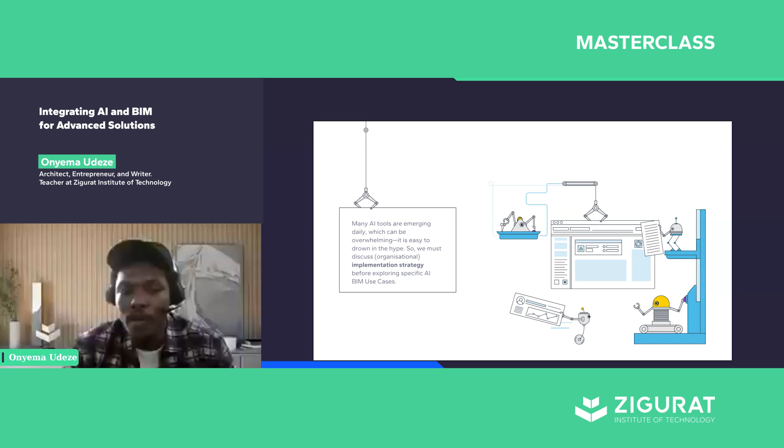Which is why it's important to also have what you call an organizational implementation strategy before we begin to explore exactly what the BIM use cases are, how we can merge AI and BIM. So before I talk about integrating AI and BIM, which is the focus of this class, it's also important to have a brief overview of the importance of an organizational implementation plan or strategy for every AEC firm.

So just like BIM, AI is also a change management process. It's technology backed, and just like every change management process, you always have three pillars: the people that are involved, the process itself, which is your business changes and all that are involved, and also the technology itself. Today we have a lot of AI tools emerging in the market, so these three pillars are very important.

So if I'm to put it in context, it's always important that a firm, instead of just jumping into the AI hype - for example, today you hear there's a tool called Veras from Evolve Lab that can help you automate your documentation in Revit, and you just jump in and purchase the tool. Tomorrow you hear about using ChatGPT to create custom GPTs, train it with your own data, and you launch and purchase that. Next tomorrow you hear about Lucid AI. So you just jump all over the place. If you don't have any cohesive implementation strategy behind all this, it can become expensive over time.

And as you can see, there are a lot of costs that can also come with AI implementation. So, summarizing, it's very important that you have a business analysis as a firm and decide exactly where you need to focus for your implementation. This might require some organizational restructuring in terms of your talent, so you need to review the talent you have in place - what are their strengths, what are their weaknesses.

So it might also require you to employ some new people. This can be full-time, it can be contract, it can be outsourced, and it might also require you to carry out what you call taking, shaping, or making new solutions. So I will explain these three terms - there are three scenarios.

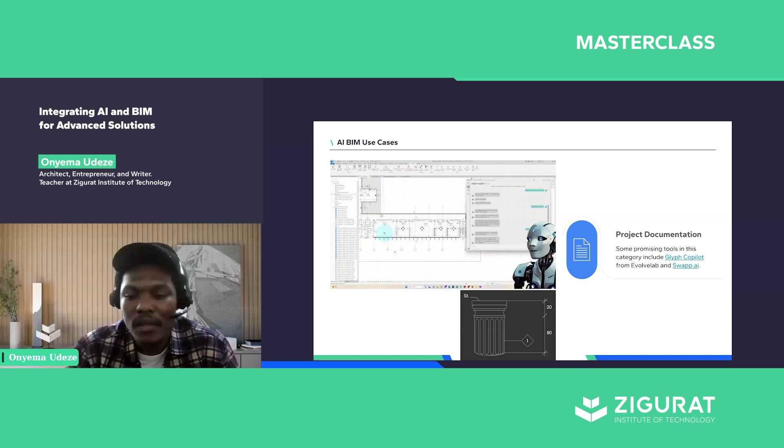The second use case I have here is generative design. As an industry, we've moved from CAD to BIM, and generative design is a design workflow that is looking promising, looking like the way of the future, where instead of modeling based on our skill sets, we are basically giving these tools some guides, more or less, and they will give us samples and help us do a lot of conceptual design analysis.

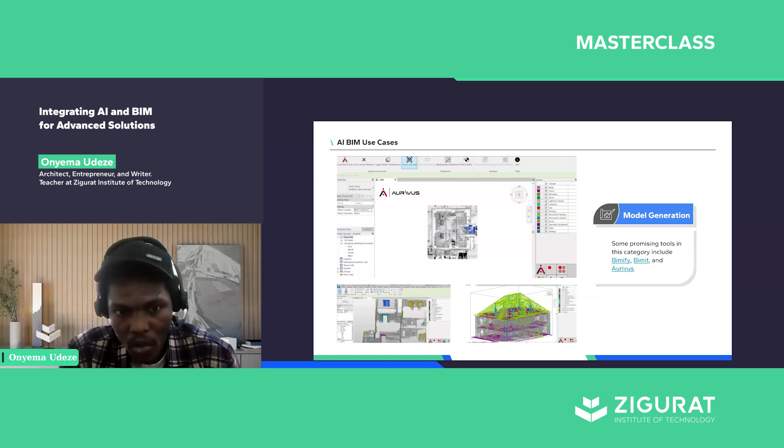The fourth use case I have here is model generation. We can use AI in the future to automatically generate BIM models from PDF files, images, CAD models, and whatnot. Instead of spending so much time creating the BIM model, you can feed these tools with a PDF file, for example, and it will give you a good starting point. Of course, that might not be the final solution, but it will save a lot of time. AI in the future can help us imagine just getting the PDF file done.

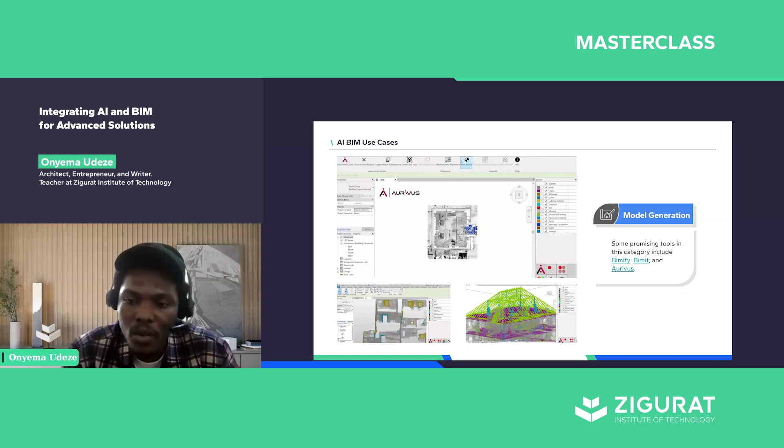Most of the existing projects today, you might not have any other information other than the PDF. Some of them you might even have just images, and you can feed this to an AI tool and it will help you to generate a BIM model. Some tools in this category today are BIMify, BIMit, or Aurivus. What you see here on the left is extracted from the Aurivus website. These are solutions that can help us generate 3D models very quickly. So that's another BIM use case for AI.

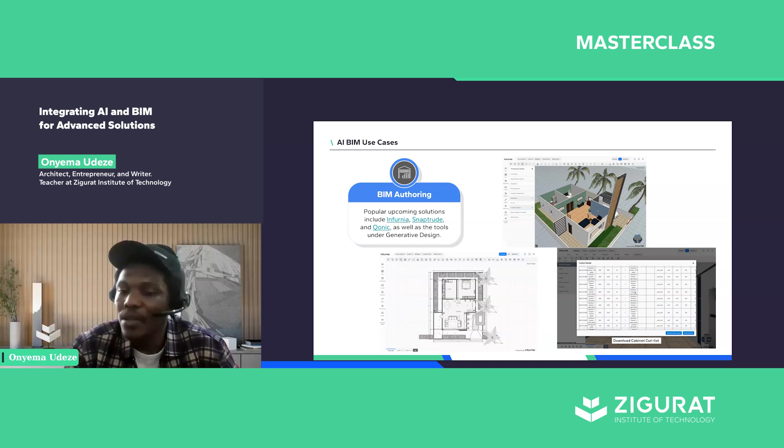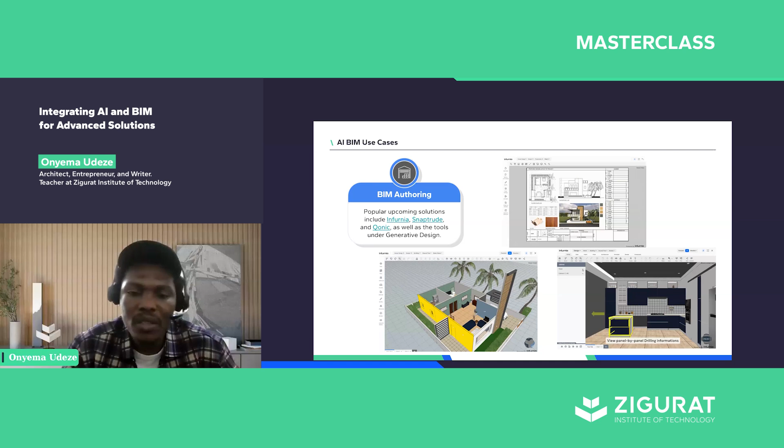Another BIM use case is BIM authoring. Like I mentioned earlier, a lot of the emerging 3D tools today are completely cloud-based solutions. A solution like Autodesk Forma, for example, is completely cloud-based, it's fileless. You don't need to worry about file formats like .rvt, .dwg, and whatnot. These are completely fileless, cloud-based solutions. And because they can generate a lot of granular data, it's easier for us to further train these solutions and make them even more intelligent.

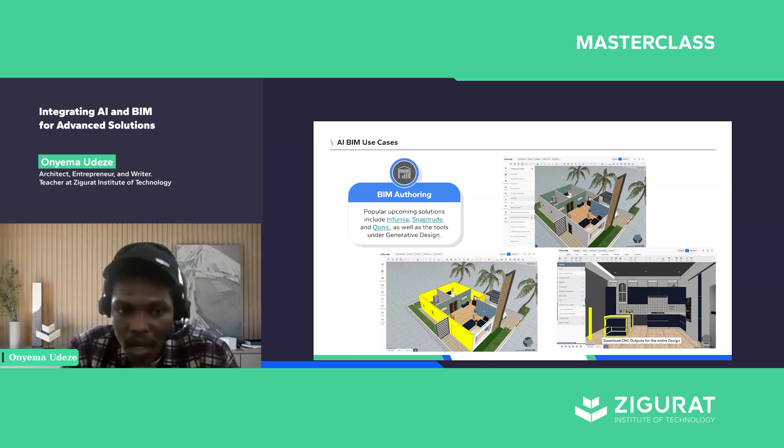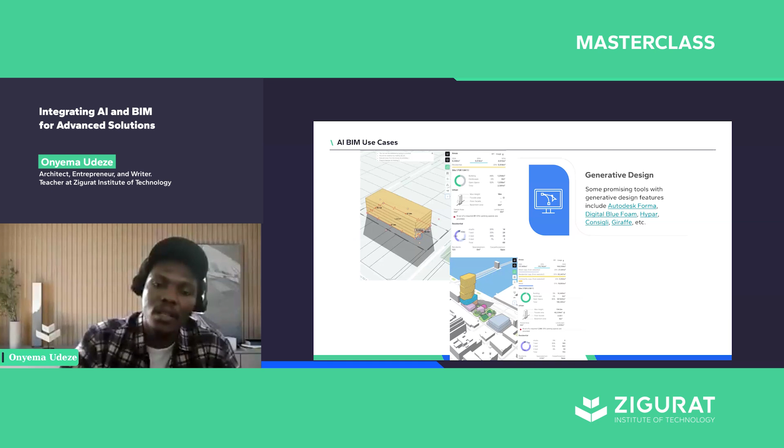In addition to the solutions I mentioned under generative design, these are also some popular solutions where AI can begin to help us with BIM authoring. We have solutions like Infurnia, Snaptrude, Qonic, as well as all the tools under generative design. Just to go back to the slide, these are the tools I have here: Autodesk Forma, Digital Blue Foam, Hypar, Consigli, Giraffe, in addition to the ones I have here. These are all tools that can help us to author.

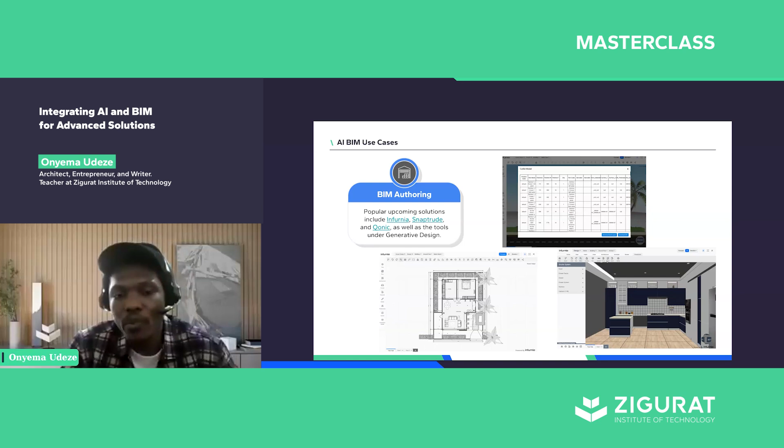So instead of using, maybe in the next 10 years or thereabouts, you might not actually be using Revit. I'm sure even Autodesk themselves are beginning to pour a lot of energy into Forma because they are seeing the scenario, or what is coming in the future, where we are going to be working less on desktop tools and more on cloud-based tools, because they are much easier to infuse with all these AI integrations.

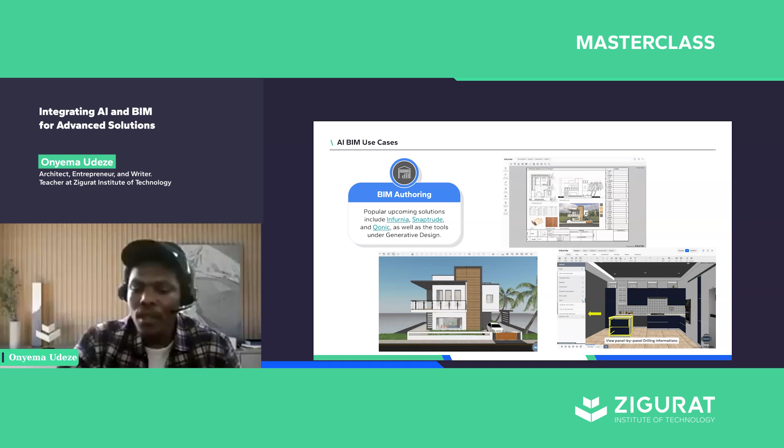Augmenta is basically for electrical design today, but they are even working on other engineering aspects like mechanical, structural, and whatnot. I also have Structure Plus. So there are a lot of areas where AI can also help engineers, even though they might not be as many as that of architectural and all that. But engineering is also another low-hanging fruit where AI can be integrated with BIM to give us much more advanced solutions.

The seventh, or the sixth that I have here, is construction analytics. So these are two things. AI can be leveraged for construction sites where you are using it to monitor. A very important aspect of AI that is useful for site is computer vision. Today you can infuse that with drones and whatnot to detect safety issues on sites. So there's a lot of solutions there.

You can also use AI to analyze the data coming from sites to give you much more insights that you might not be able to detect by just human intelligence. So there are a lot of tools here, and there are two things here. Like I said, you have construction on one side and data analytics on the other side. Some of the tools I have here are Sparkle.ai.

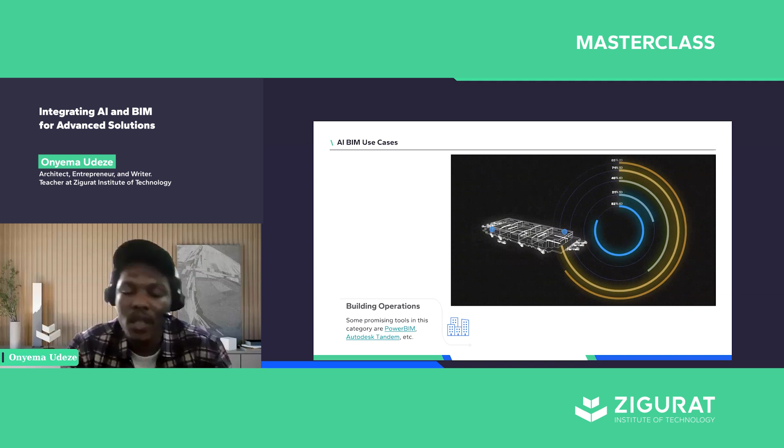For example, you have tools like PowerBIM and Autodesk Tandem today that can be used during the operation stage. Solutions like digital twin, where the digital version of that facility is communicating in real time with the physical building. These are areas where you can begin to analyze that data, and even use it for things like predictive maintenance and a lot of other use cases. So as you can see, AI spans across almost all the entire phases of every built asset's lifecycle.

And then we also have business operations. Day-to-day run of business is also something that is very key. This is an area where you can begin to use some of these large language models, LLMs, and assistants to augment your day-to-day businesses. You can use things like Microsoft Copilot, Microsoft 365 Copilot, ChatGPT, Claude, Perplexity, Fireflies.

Fireflies, for example, is a solution that you can integrate with your meetings. It just follows you to your meeting, and at the end of the meeting, it will basically record the entire meeting, and it can help you summarize that meeting, and you can even query it, ask it a lot of things. So these are areas where AI can actually begin to augment our day-to-day business operations. That's also another low-hanging fruit.

And I believe this is the last one, which is interoperability. Earlier I mentioned that one of the issues we faced with a lot of tools, solutions and software in the market, by the time we moved from CAD to BIM, we had a lot of vendors like Autodesk, Graphisoft, Bentley, Nemetschek, and all of them.

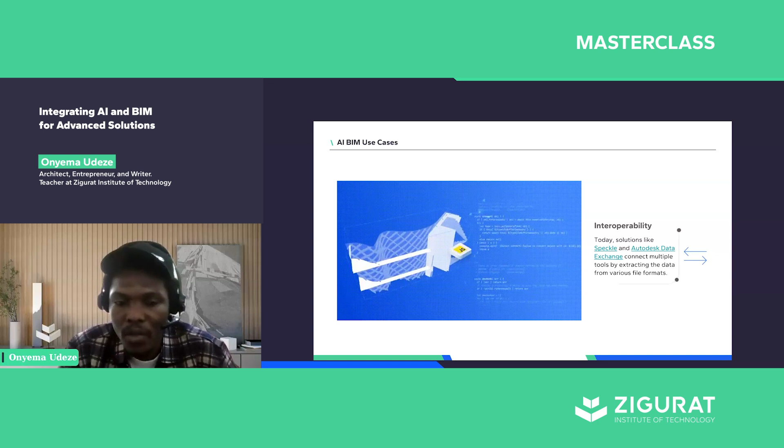So you have two interesting solutions. One is Speckle, which is what you're seeing here on the left. Basically what it does is that it can communicate in real time with a lot of different software, and it can extract the data from them. And then all that data, you can now use for your other designs. You can use it to carry out analysis and do a lot of things.

The same thing with Autodesk Data Exchange. And one good thing about all these tools, like I said earlier, is that they are all cloud-based solutions, which is why you see that where the industry is headed is basically cloud. Because most of these emerging tools are all cloud-based, it's easier to integrate and extract that data and use it for even more advanced analysis. So that is the 10th. I've basically illustrated 10 different use cases where AI can be integrated with BIM to deliver some advanced solutions.

I highly recommend that platform. You can go there and query it. It even has a custom GPT that is also trained on the website as well, so you can ask it a lot of things. There are a lot of use cases. And as I said earlier, AI is in its early phases and is rapidly changing every day, so some of these tools I mentioned might not eventually be the winner in their categories, but these are some promising tools and use cases that I have been able to identify myself.

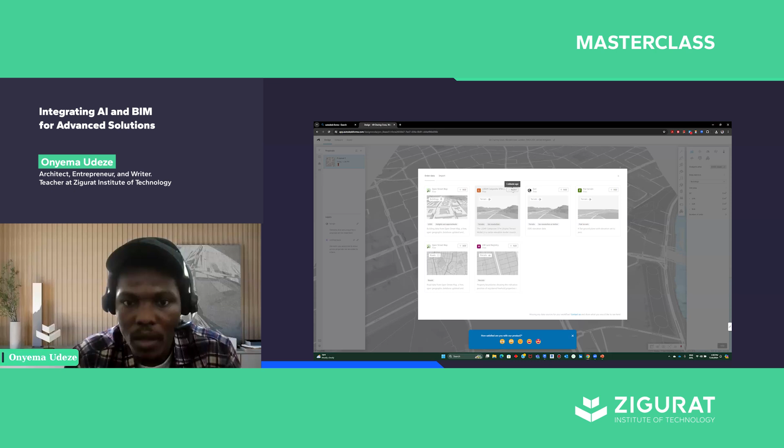Depending on what you need, you can see that this one has to do with topography—this is a 3D terrain model, it's already added. Some of them are geographical information, depending on what data you have available in that area—this is a terrain model and whatnot, and this is the road. I'll just add the terrain and road for now.

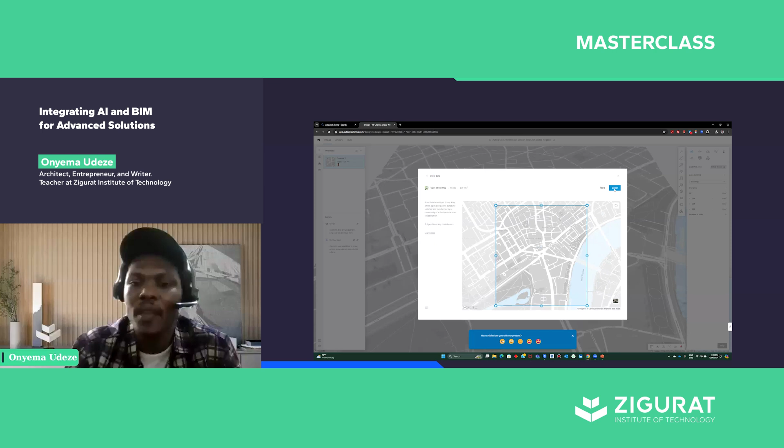And then you now need to define your area. So this is now what I have here. You can see, without doing much, it's already showing me what I have in that area. This is the point where, by the time you come here, you go to your library, you can begin to add some of these things that you've already brought in, and now add them to your project.

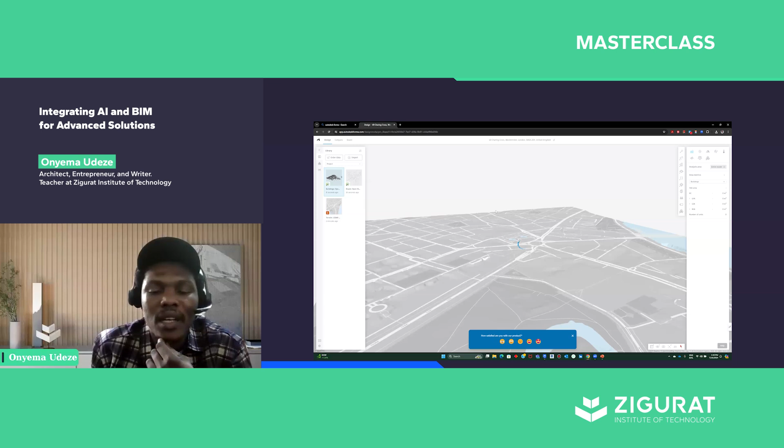As I double click on it now, you can see that it's trying to load it into my site. After that, you can quickly use the generative tools here on the right to come up with forms. Of course, because of time, I won't be able to go into details, so what I'm going to do is just use one of the demo projects—it's a very simple interface.

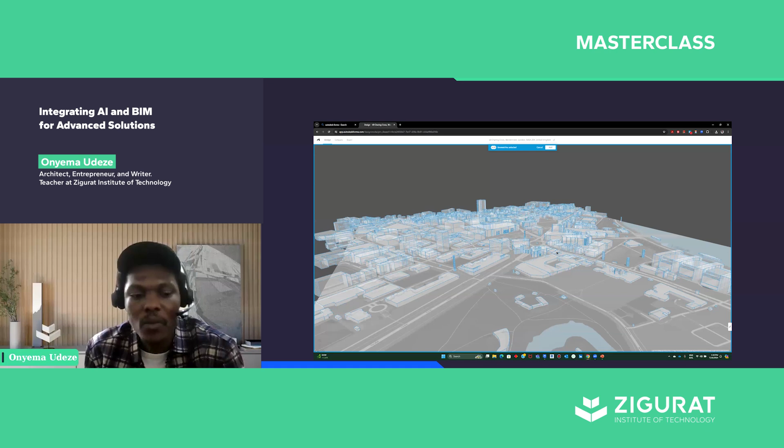What I wanted to point out here is you can see what this looks like already, so I can just add this. You can see with just a few clicks what's happening—I just added this from scratch, and I can also add the roads by clicking on that as well. So even with these very simple few clicks, I can begin to carry out analysis. This is the terrain model, and this is the roads.

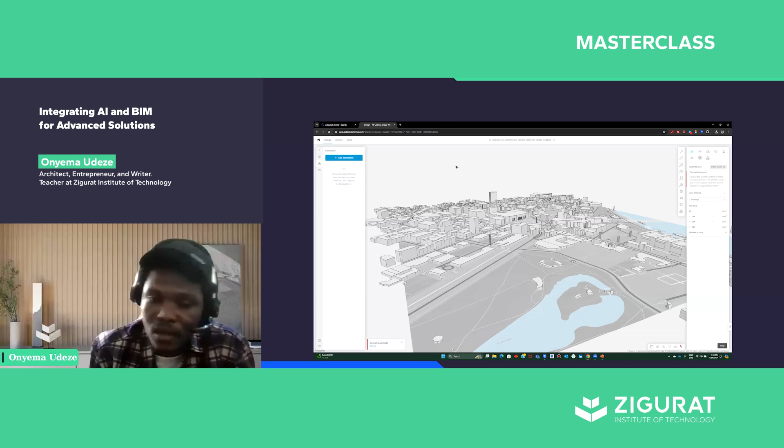You can see, by the time you come to this place, you can add extensions as well. That's a good thing with Forma, because it's running on Autodesk—it already has access to the whole of the Autodesk App Store. So we have solutions like TestFit and many others already integrated into this. That's one of the advantages of this Autodesk solution, because it already has a lot of integrations compared to some other ones.

So you can invite project members and do a lot of things—I won't dwell so much on this. But like I said earlier, you can create different proposals and do a lot of design options and whatnot. If you look here, you can see the road, the buildings, the terrain and whatnot. You can choose which of them are on the base and which are specific to a particular proposal.

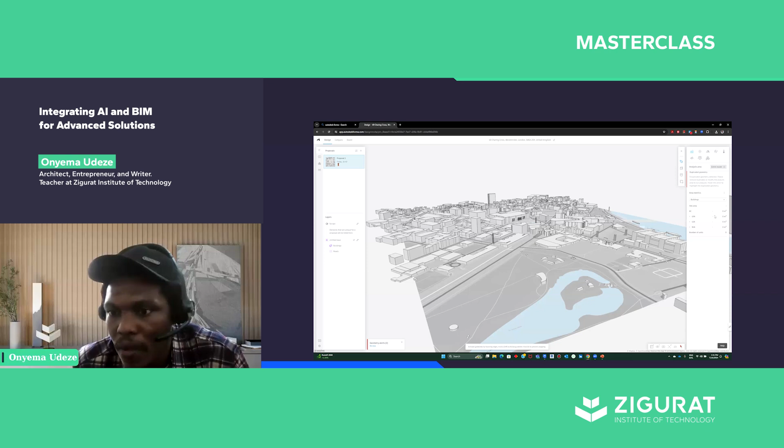What I wanted to point out is that for you to begin creating forms, unlike in Revit where you're basically doing everything from scratch, in this generative design approach you are just giving it some inputs. For example, let's say I want to create this surface—all I have to do now is specify... let's say I click on this cube and drop this here.

So you can see this, the way it's just coming out. Now I can come here and begin to specify the width, the length, so it adjusts in real time. If I also want to create a building, I can tell it the number of floors, the floor to floor height, and all those things.

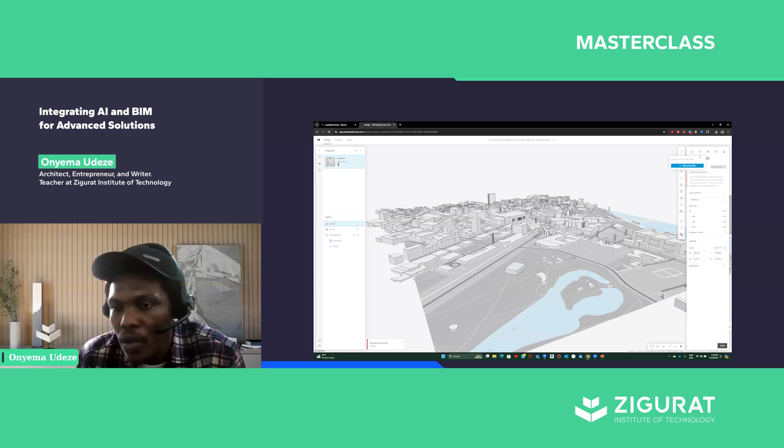Because I'm conscious of time, I won't spend so much time on this. But if you come up here, you'll see a lot of analysis you can perform. Just at the early stage of a project, you can carry out sun hour analysis, daylight potential analysis, wind analysis, and a lot more, with very few clicks. This is based on actual contextual data, not some random analysis. It's real time and contextual.

So of course, if I want to push this out to Revit, you can always share this, right? So by the time I come to... just a minute. I can see there are a lot of questions, but I won't spend so much time on this. So you can create new proposals and you can also push this out to Revit.

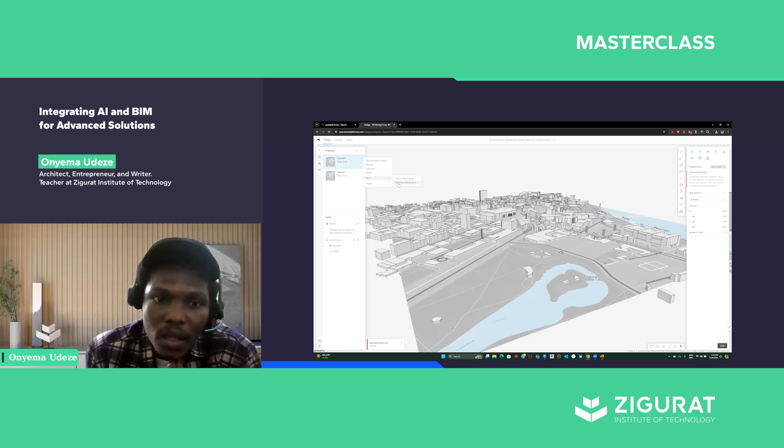So if I come to a proposal that I have here, you can just click here and you can see Revit. You can send this to Revit, or if you've not downloaded the plugin, you can download the Revit beta. When I send this to Revit now, you need to make sure you have the same version, the same account that I used to log in here as well in Revit.

So if I come into Revit here, I just start a new project. Let's say I start with an architectural template and whatnot. You need to make sure it's the same account. So by the time you go to collaborate here, you will see the Forma, sorry, Massing and Site, not collaborate. So you see the Forma panel here.

So you can load a proposal. If you click on load proposal now, just make sure to connect and download the latest version. I've not opened this in a while, but basically what it does is extract and communicate in real time. This will take a while, so I won't wait for it, but basically this will bring that design into Revit.

And there are two ways. You can see here, you can update proposal. So what happens is whatever changes you've made in Revit, it will send it back to the cloud. Because of time, I don't think I'll wait, this might take a while.

But what I'm trying to say here is that the two solutions, Revit is a detailed design software and Forma is a conceptual design software, can communicate in real time. As you're making modifications on the cloud, you can push it to Revit. As you're making detailed updates in Revit, you can push it out to Forma on the cloud. So it's bi-directional.